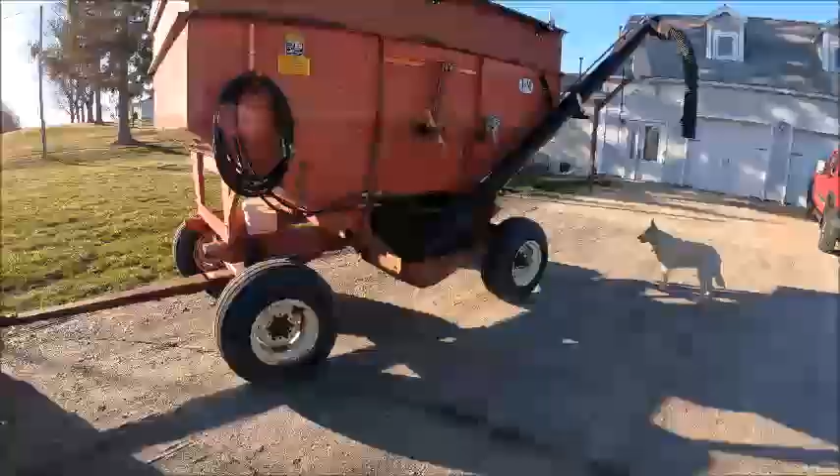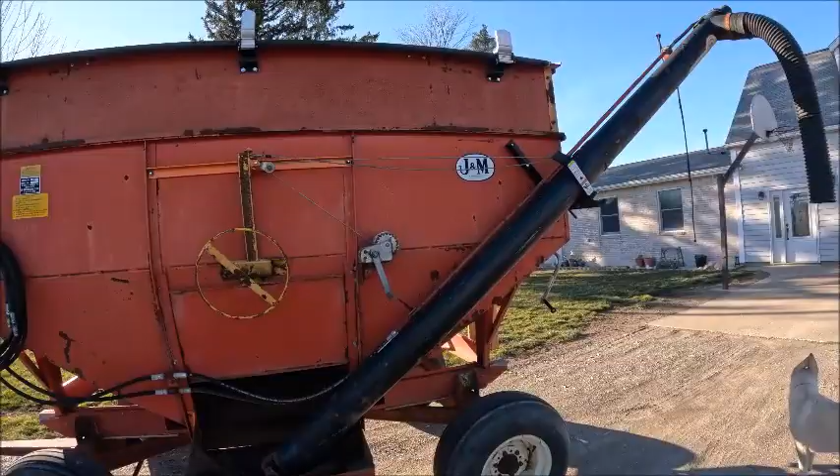All right, I was originally intending to start servicing tractors today. I was gonna start working on getting that 66 serviced out, but thinking while I had this nice weather, I really ought to, before I run out of time, get the auger pulled out of this thing so I can get a replacement for it, since I'm done handling dry fertilizer with it, at least in theory. I switched the planter over to liquid, and hopefully here in the near future I'll switch to 28 for side dress, so I won't need to handle dry fertilizer anymore.

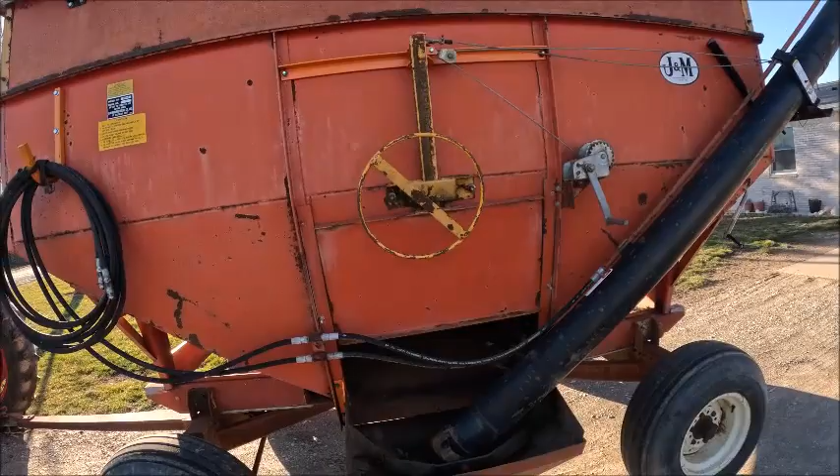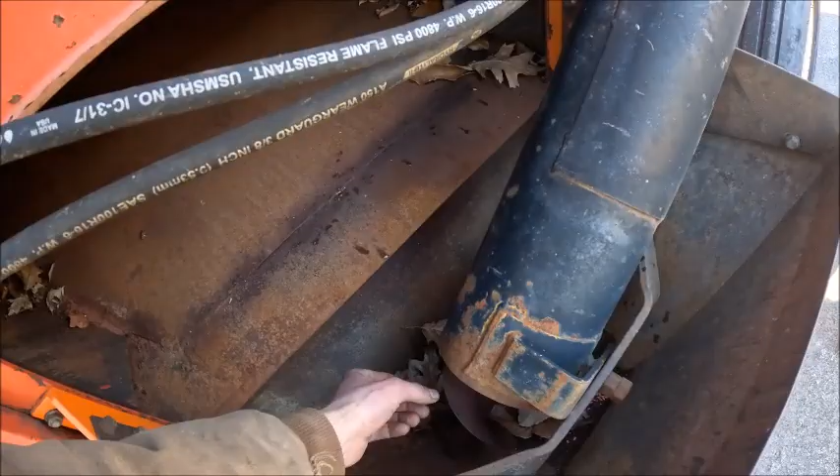So I'm going to start handling bulk beans. I ordered a box of beans this year for the first time, and you can't necessarily just fill a planter out of a box of beans. You've got to have a way to get the beans from the box to the planter, hence where a seed tender comes in. And you can't tend seed with a steel auger, plus the auger in this thing is junk anyhow. It was junk when I got it, and it really should have been replaced when we put it on here, but money things. So now that I have the financial means, and I actually need it to be a seed tender, it's going to get a poly cup auger put in it.

My initial intent was to put a brush auger in it, but brush augers are getting so expensive now. I was doing some looking around, because before, if I remember right, straight from Unverferth, since this is an Unverferth auger, a poly cup auger for this thing is damn near 800 bucks by the time you get shipping and everything involved, which was just ridiculous. But looking online, I actually found the cheapest I can buy a poly cup auger for this thing is through May Wes Manufacturing. They sell 5 and 6 inch cup augers by the foot.

Basically, they build them to your spec. But in order to order it from them, I need to get it out of the tube so I can get it out on the ground and do some measuring, because they need to know the length of the flighting, the length of the tube, the drive type, yada yada yada. So I need some dimensions off the auger.

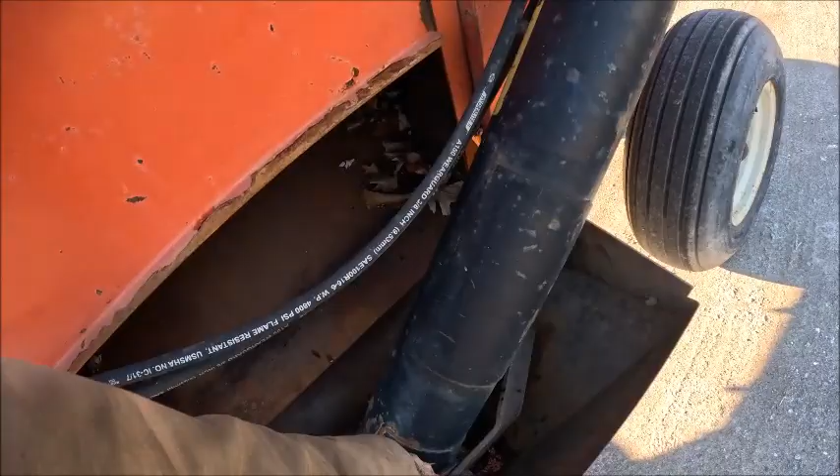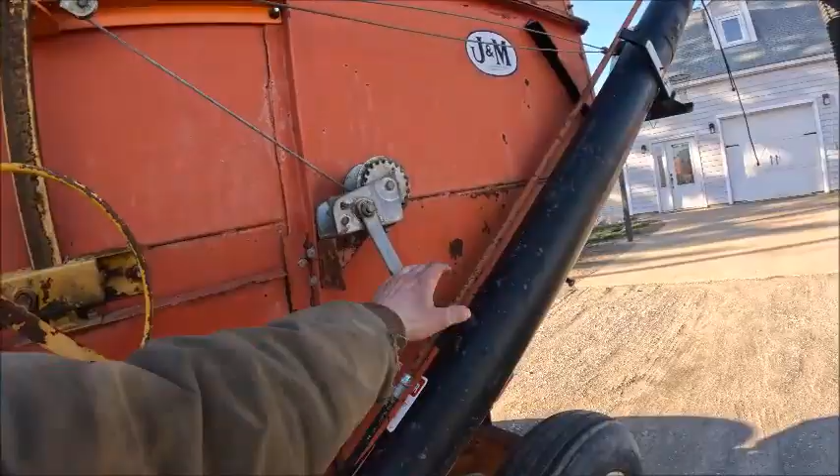My hopes are I can leave it sitting in the cradle and throw a strap around it and just pick it up with the forklift. I'll have to undo the cross bolt in the hydraulic motor, and then it should slide right out the end. So I need to get my snoot off and get it unbolted here, and hopefully, like I said, I can just throw a strap around it and pick it up enough to slide the auger out, then set it right back in, without having to take it all the way off or do a whole bunch of handling to get it off the wagon.

We'll get it unhooked from the motor first, so that I'm not wrestling a limp noodle.

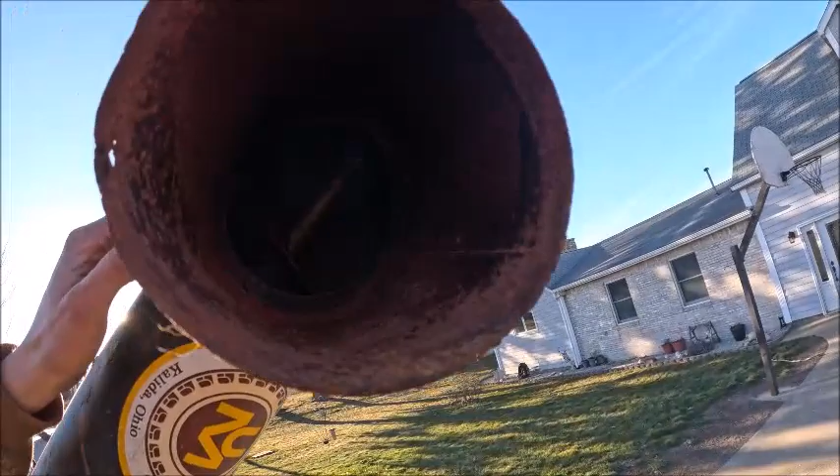Okay, sunlight. Ow, sunlight. Where's the bolt? Seriously, where's the bolt? Did it fall out again and that thing is just hanging out in there? Because that's happened before.

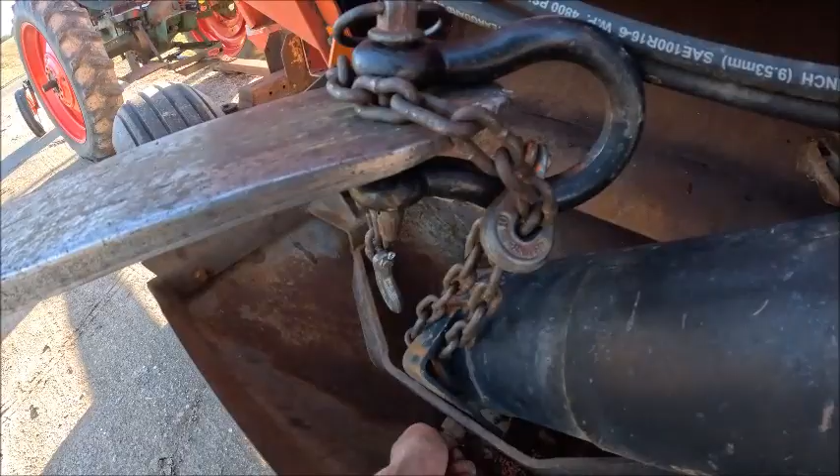Alright, it was up there, you just had to look for it. It's higher up inside the tube than what I thought initially. So hopefully this works out like I think it will.

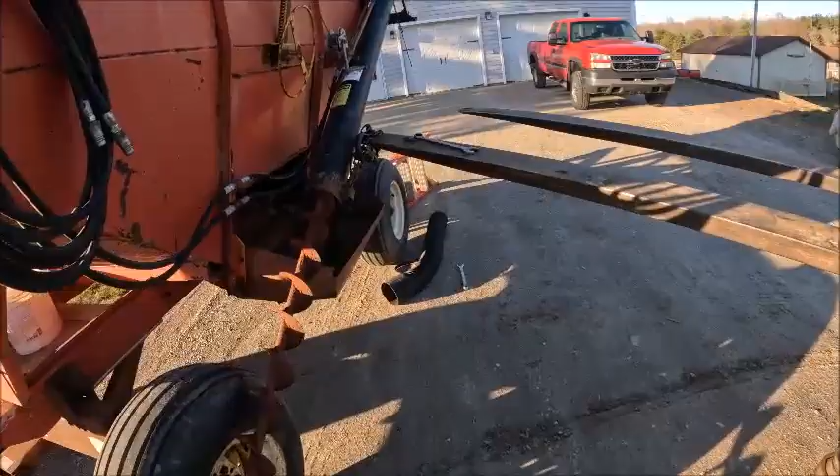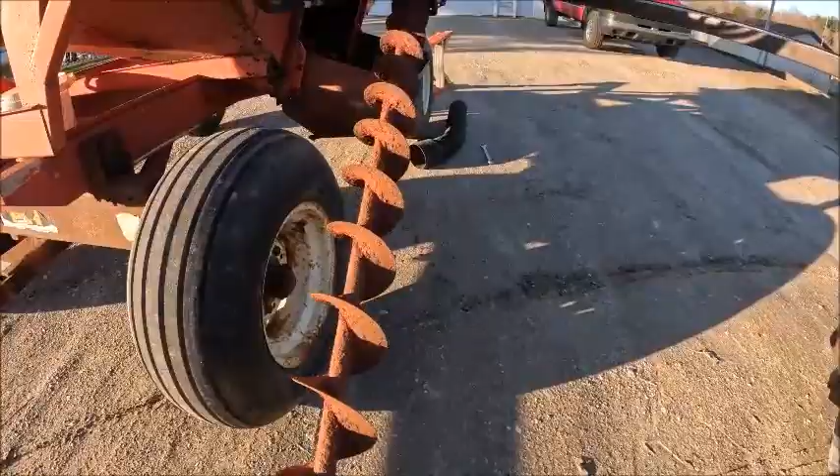Okay. Come on, so close. This old girl's getting crusty.

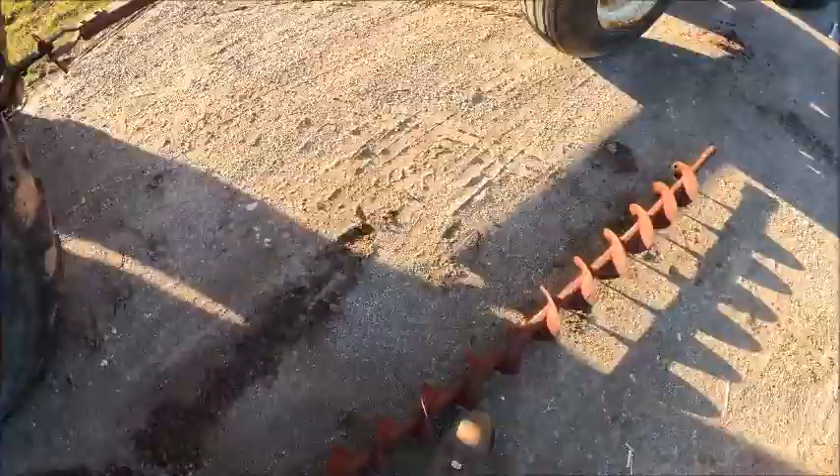Alright. That auger's shot - the flighting's paper thin up here at the top, not to mention the fact that it's just a ball of rust. So I'll go ahead and get this set back down in the hole and bolt it back down so it's secure, and we can measure this up.

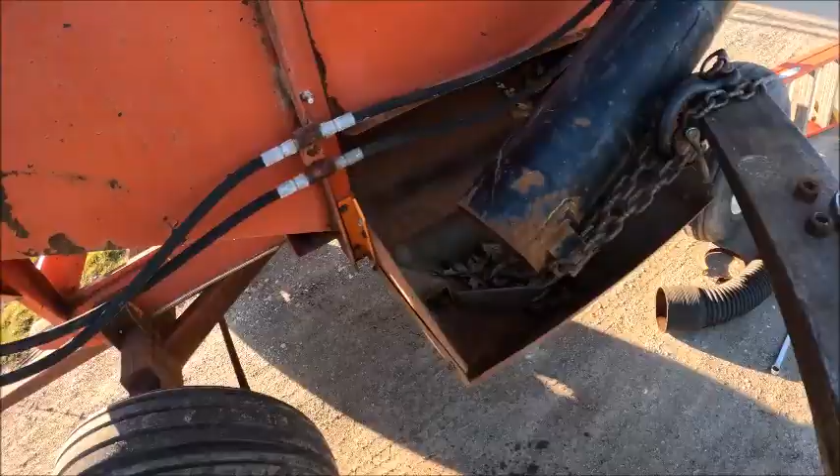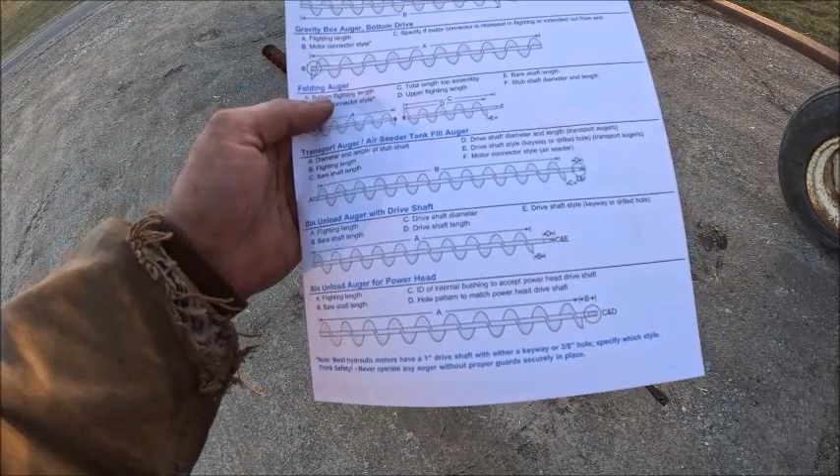Alright, I went in and printed off the measure sheet so you guys can see what we're going for. They've got all sorts - actually they've got six different types of augers they build, anything from gravity box augers to bin unload augers.

The whole reason I need to put a poly auger in this is you can't handle seed with a steel auger. Steel augers will split the seed, and split seed, depending on how it splits, might still germinate as long as the germ didn't break, but chances are very good it won't.

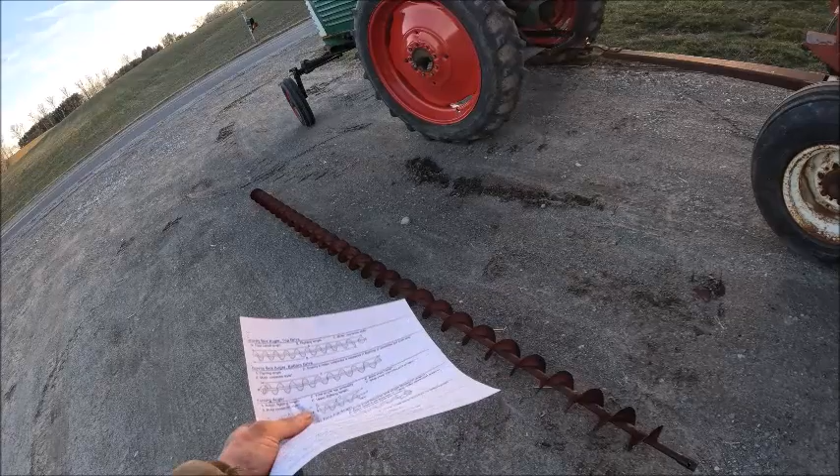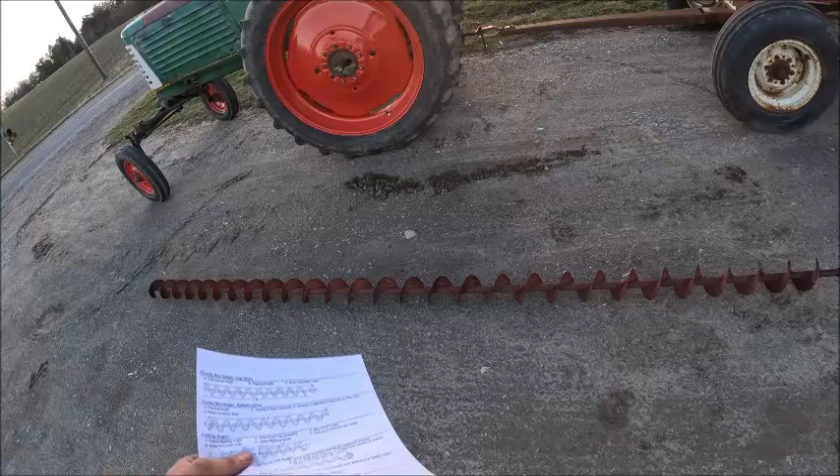So that's no good. In a seed manufacturing plant, there's augers to handle discard seed, anything not destined for the bag, but anything that ends up in the bag only sees the auger on the harvester. Once it hits the processing plant, the seed that goes in the bag does not touch a single auger. Everything is handled by conveyors or cup elevators.

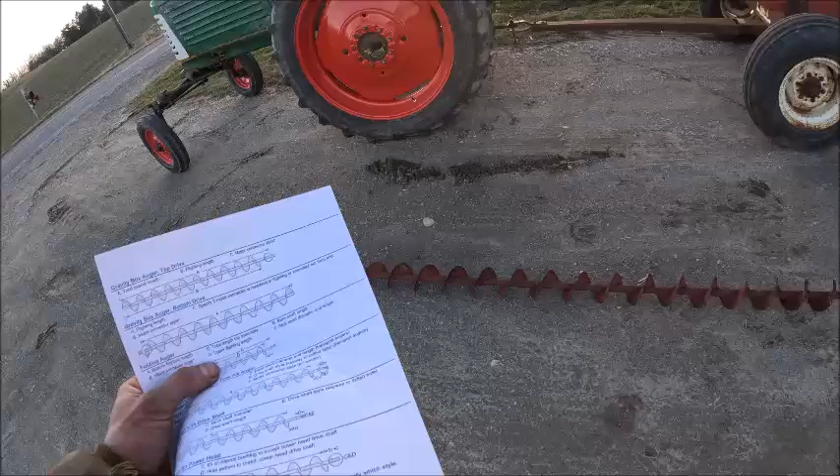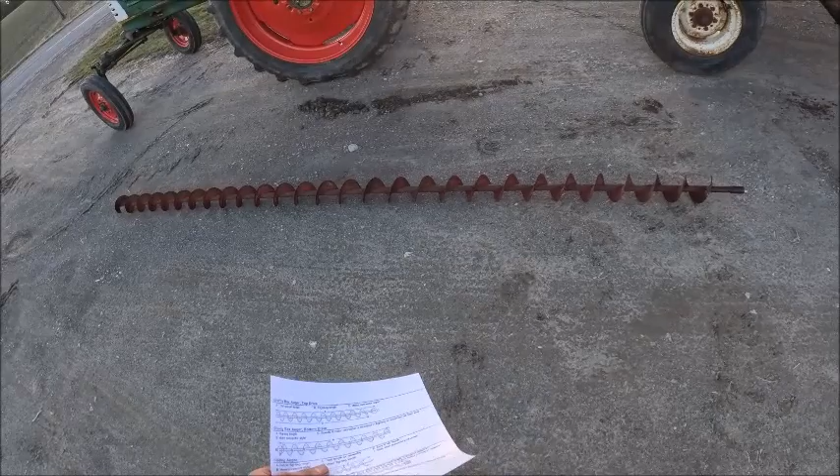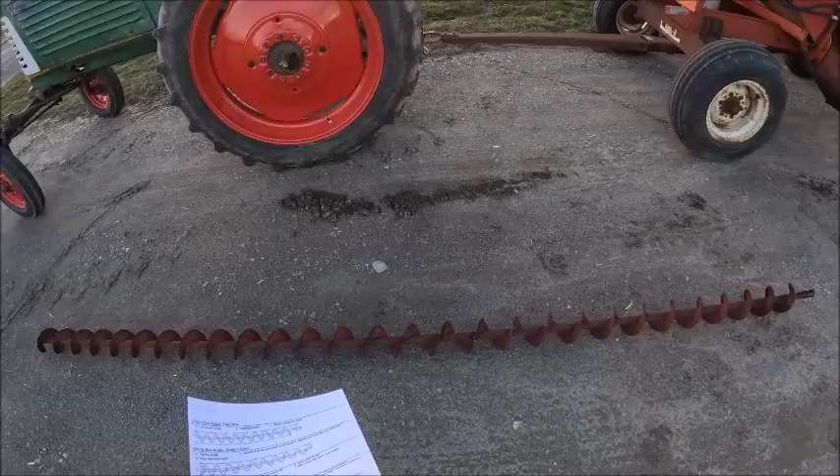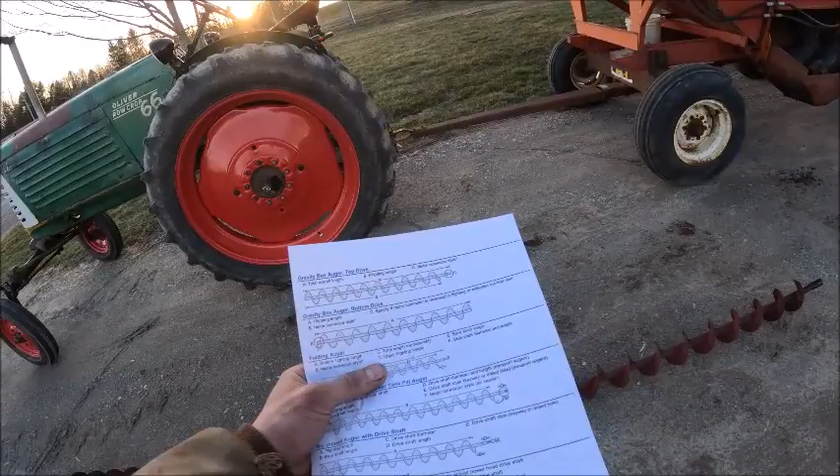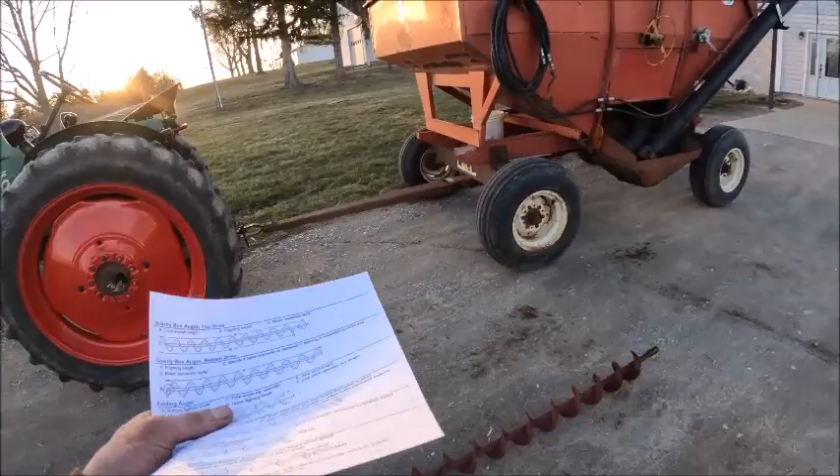For a while, at least when I got this, a brush auger was the cheapest route to go, aside from putting a brand new steel auger in it like this. But right from the start, through Lundell, another manufacturer that specializes in poly products, it was like an $800 auger, or $730-$750 depending on how you option it out. Through May Wes it's about, well, I'll know when I get everything measured out and ordered, but it should be less than 400 bucks. I don't know how May Wes can manage to be half the price, but that's not bad at all.

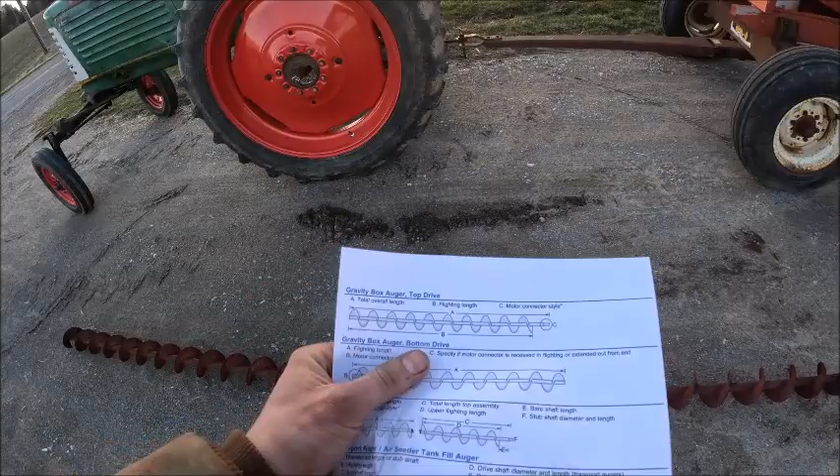So for this, it's going to be a gravity box auger top drive, which is this top guy here. They need overall length, flighting length, and connector style. And actually there's a third dimension - they need the diameter of the auger tube, because there's a 6-inch tube and a 7-inch tube, which would take either a 5-inch auger or a 6-inch auger.

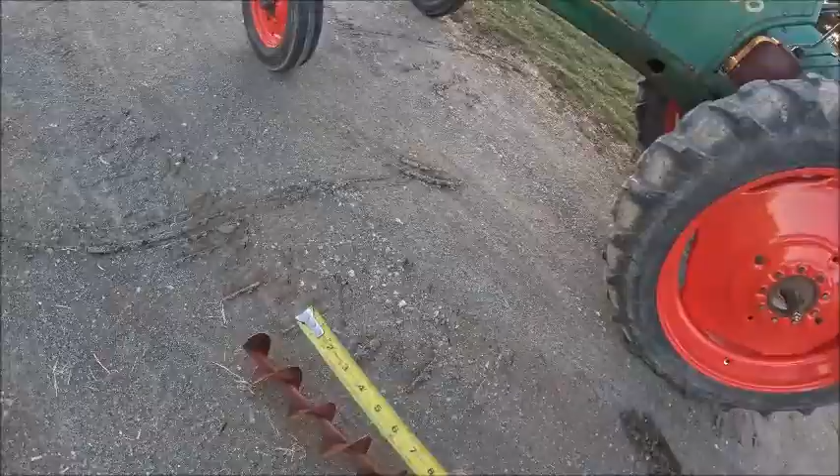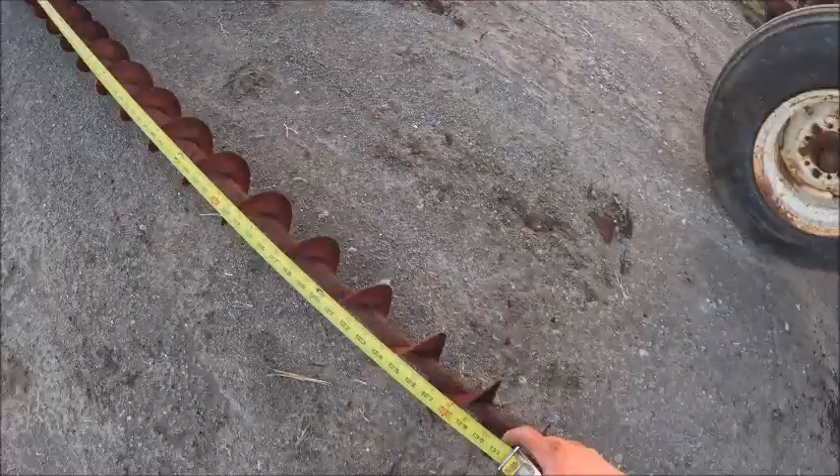So, overall length... if it'll stay... flighting length is 137. Overall length is 143 and a quarter. What did I say? 137.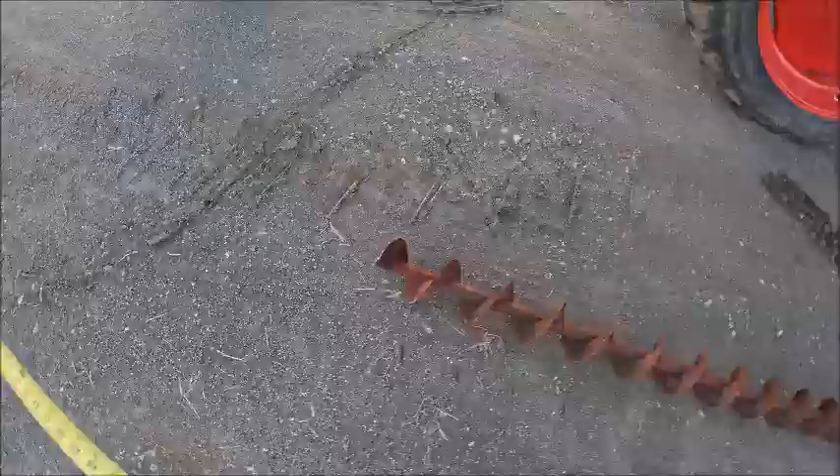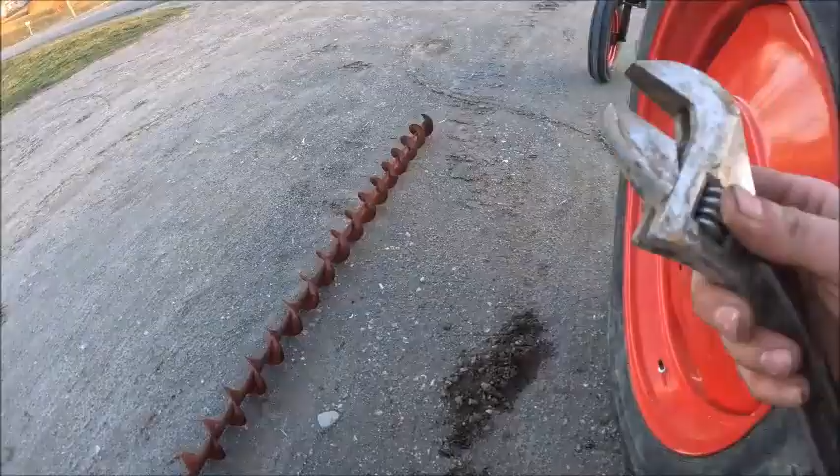Come on, damn you. I'm gonna have Dad help me measure this, because the end of that, not that a half inch is gonna matter one way or the other, but might as well get it as best I can into this auger. Unless I can take my... this work, maybe, if it's not stuck in a spot. It's stuck in a spot.

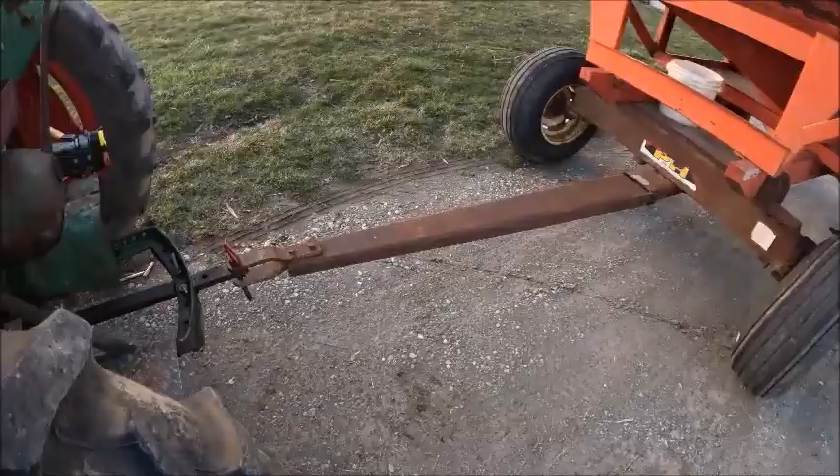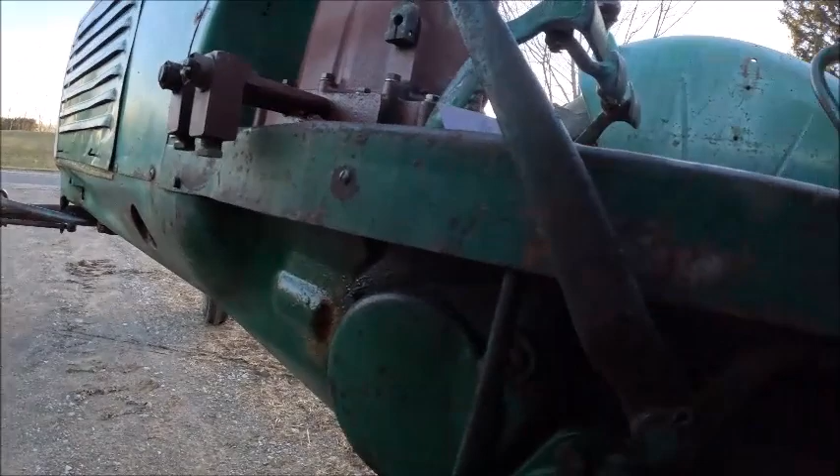Okay, that's better. Okay, 137 and a half, and I'm betting it's supposed to be 12 foot. We're gonna call that 144. I guess just to make it even numbers, we're gonna say 138 on the flighting and 144 overall.

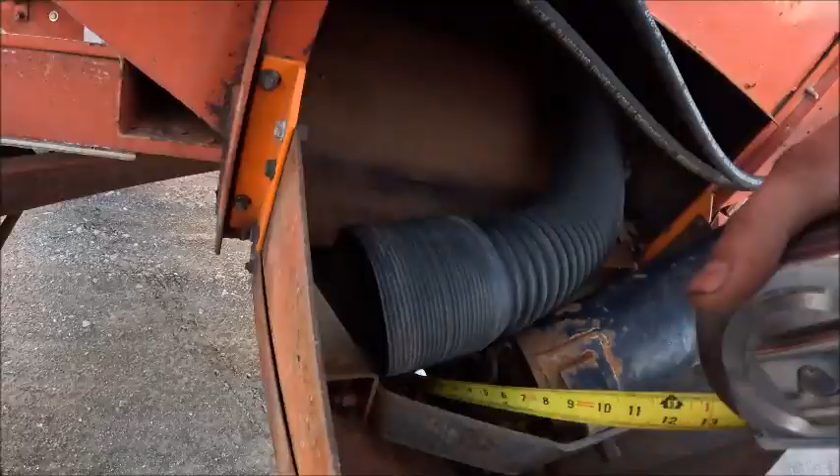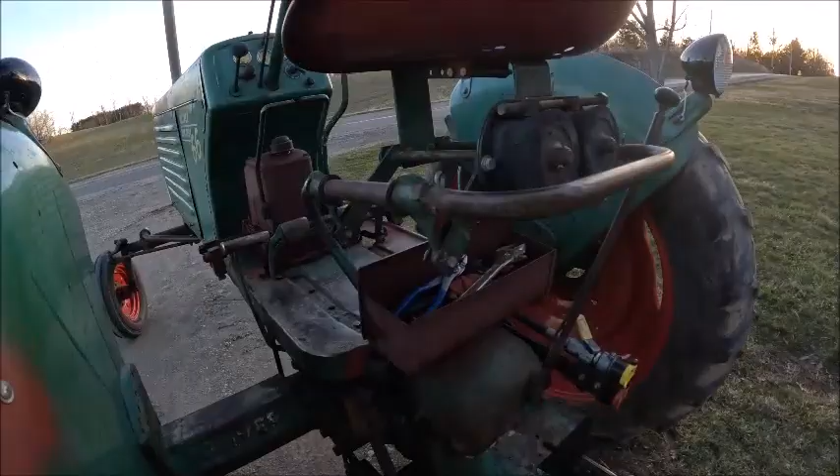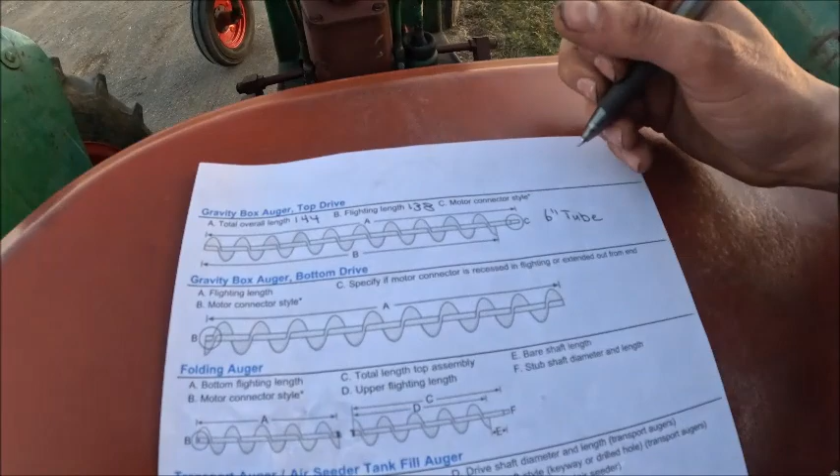This should be a 6-inch tube, which means it's going to be a 5-inch auger. And the motor style, or connector style, should just be a 1-inch stub shaft with a cross bolt, which is what that is - pretty standard on these guys. Right here, asterisk: most hydraulic motors have a 1-inch drive shaft with a keyway or 3/8 hole. Specify which style - so 1-inch shaft, 3/8 hole.

So I guess I can get this. I'm gonna wait to get that cut because I'll just cut it in a couple pieces to make it easier to handle and haul off to scrap. But I'll wait to do that till we got the new auger in hand.

So I think that should be all we need to do here. I'll have to order that. I think I could probably order it on their website, but their website's kind of clunky, so I'll just call and order it tomorrow and be done with it, because sometimes it's easier to deal with a human being that knows what you're talking about rather than a computer that thinks it knows what you're talking about. So yeah, I guess I'll take this thing up and park it and call it an evening. That's it for this one, I'll catch you guys on the next one.